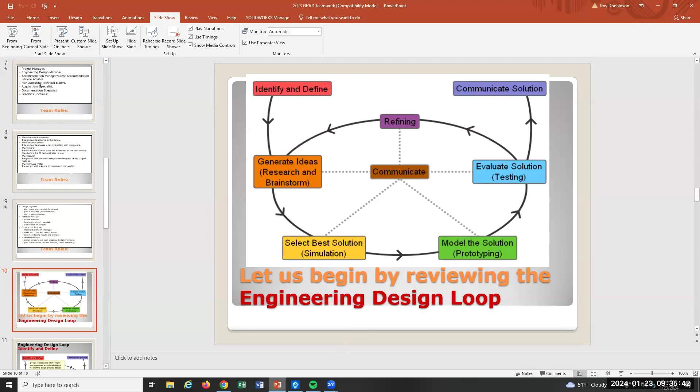All right, let's see here. Who currently has GE115, which is the AutoCAD class? Show of hands. Oh, there's only a couple of you. That's good.

This was covered in the AutoCAD class, so this is redundant for anyone who has engineering graphics. We start with this concept of orthographic projection. If you've never seen it before, then I need to show it to you because you're going to have to do graphics on your project. We work with graphics a lot in the engineering world, so you should become aware of at least orthographic projection, the concept of it. This is going to be your lab today. You're going to do a little homework set on this, so try to follow along and ask questions if you're not sure what's going on.

It's our way of documenting and sharing information, right? Spatial information, whether that's a building or a widget, a part, doesn't matter, we do it the same way. Every industry does it a little differently, so civil engineers might do it a little differently than mechanical engineers, and chemical engineers or electrical engineers would do it different again. It's just a different drawing standard.

The American National Standards Institute, ANSI, is the one that sets up all this code, standard code for drawing. So I'm going to give you just a few rules I don't want you to break, given to us from ANSI. These aren't Troy's rules, these are engineering rules, and it allows us to share drawings. So when I send a drawing off to Intel, they get it, they look at it, and go, oh, I understand this because it's all to code, it's all to our standard. They send me a drawing, I look at it and go, oh, I get that. I understand that symbology, I understand those dimensions, I understand that layout. It's so we can exchange drawings and everything looks similar.

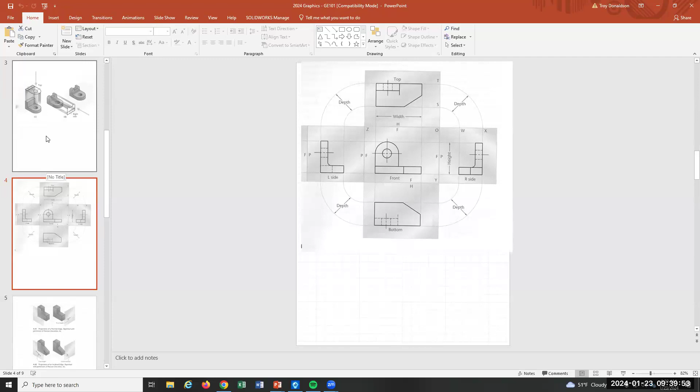If it's a dashed line - see there's dashed lines in this right side view - that is geometry that we cannot see, but is there. It's hidden. Those are called hidden lines. So we want to represent hidden geometry, but we use a different line type, a hidden line. These solid continuous lines are visible lines or visible edges of the object.

So an edge makes a line, even if it's not a 90-degree edge like this line right here, where this surface goes away from the front view. So if there's an edge or a surface change, it produces a line. It's a continuous line if you can see it, it's a hidden line if you can't see it.

Like on this side, what are these hidden lines representing? The hole. In the right side view, you can't see the hole, so we put in the top of the hole and the bottom of the hole as a hidden line. What about the top view? Same thing, the hole. And where do we see the hole in circular form?

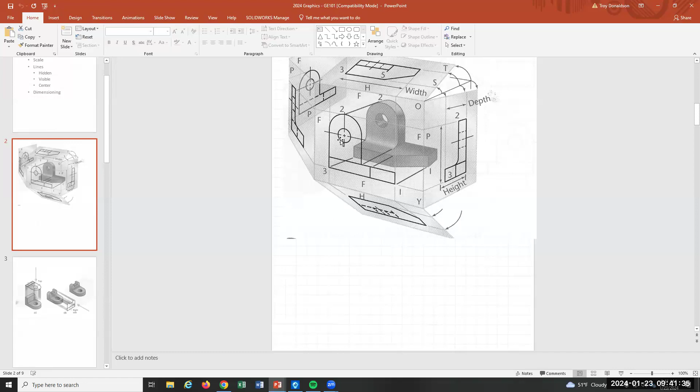Front view, right? So the front view is the best visual description of the hole. It looks like a hole in the front view. That's where it should be dimensioned, that's where you should call out its size and location, where it is best seen by all of us. So that's one of your first rules for dimensioning: you want to dimension where it is the most obvious thing that you're dimensioning. If you're going to dimension the hole, call out its radius or diameter in the front view because that's where it looks like a hole.

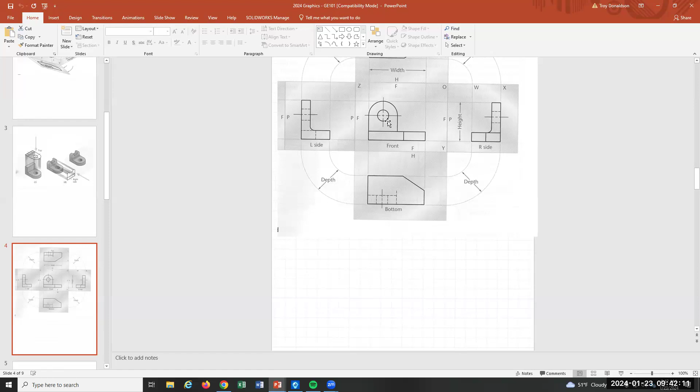Over here, it doesn't look like a hole, it just looks like a couple hidden lines. And up here, that doesn't look like a hole either. I know it's a hole because my brain is putting the three views together, but here's where it looks like a hole.

What about this sloped surface? See it here? That's it right here. Can I tell from this view that that's a sloped surface? No. What about this view? That's it right here, this sloped surface. Yeah, but I can't tell. Where do I see the actual slope cutback? Top view - that's where you should dimension it, in the top view.

Does that make sense? All right, we're going to work on making front, top, and side views. Notice they're in projection - we call it in projection. The front view's here, the bottom of the front view lines up with the bottom of the right side view. That's called projection. The hole, if I projected the top of the hole over, it goes right to that hidden geometry.

Same with the bottom of the hole, projected over to that hidden geometry. The top of the arc projects over to the top of the right side. That's called projection. We want the front, the right side, and the top in projection of each other.

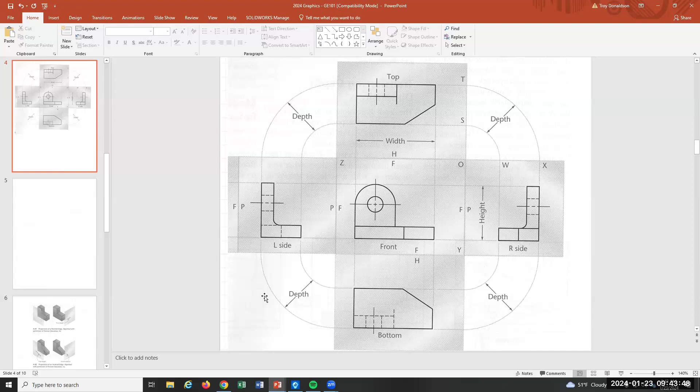Looks like this when you get it done. It's a different object, right? But we see the front view projects up to the top view. In other words, this edge lines up with this edge, this edge lines up with this edge. Does that make sense? You don't put the projection lines in, but they're there. Same with the bottom here. Of course, the right and the top don't project to each other, but that's the organization we're looking for: front, right, top.

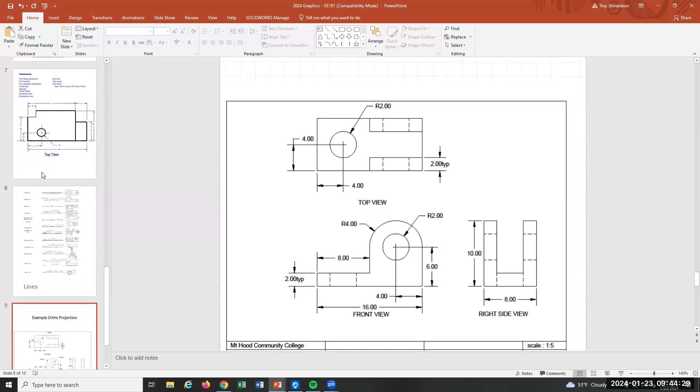Good so far? All right, let's talk about dimensioning just a bit. We're doing good. In graphics, you get this for a few weeks. In GE101, you get it for a few minutes.

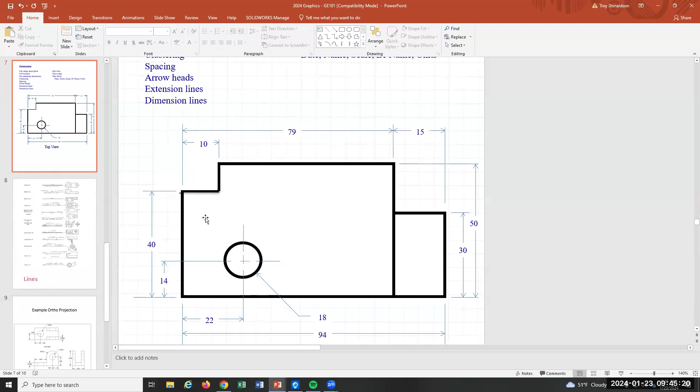Dimensioning. Notice that all the text is one direction. It's called unidirectional text, it's all horizontal. That's mechanical engineering. Civil engineering will rotate these verticals and put the text kind of up and down. So that's just a different standard for a different set of drawings. Civil engineering is more construction, land development. Mechanical is more parts and widgets and things, right? So we're going to go unidirectional because I like it, I get to be in charge, and I'm a mechanical engineer, so it's my habit.

Your goal is full shape description and full location. That's your goal: full shape description. In other words, if I give it to somebody else, could they make it? Do they have enough information to make it?

Okay, we don't want too much information. Notice the 79 is here, right? And it's not down here again. So we don't put the 79 here and also up there, that would be redundant. So we don't want redundant, we just want it in one spot, the best spot, the most descriptive. So none of them will look the same, we're all going to do it different. That's okay, right, it's just fine. You can look at somebody else's and go, oh, that's a good way to do it. We want to kind of cluster them.

So the 14 and the 22, like these two, are what? Location, locating the hole. So the hole's got to be located for somebody to put it in, right? So we have location dimensions, we have size dimensions. What's that? Probably a diameter, but they should have put it on there. Diameter or radius, one or the other, right? But that's the size of the hole, correct? Yeah, that's called a leader. Leaders are nice because you can kind of sneak them in anywhere, you can just find a little spot to sneak it in.

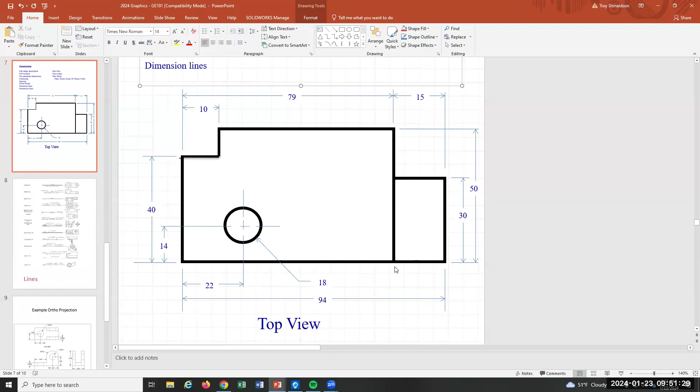This is... not that one. Let's look at it. This one is what you're going to do. All right, so you're going to take a piece of paper. There's white paper around here. If you want to use a ruler, you can take one with you if you want. They're in the box back there. You're going to do a hand drawing and try to make the front, top, and side view.

And this is due Thursday. Yeah, we have a quick turnaround thanks to the ice storm. Yep, you're gonna want to get this done. You're gonna give it to me on Thursday's lab. So you got to figure out what the front view looks like, the right side, and the top, right?

Right side view, go over the drawing. Yep, yeah, I just want the front, top, and right side view.